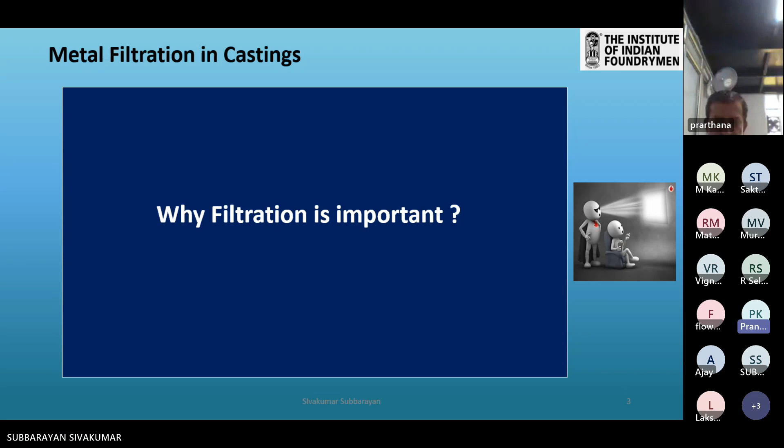Before we go into the actual foundry filters, let us go through some basics. What is filtration? Filtration is a process of inline metal treatment, a kind of metal treatment that takes place before the liquid metal is cast, meaning before the liquid metal enters into the casting cavity.

It prevents inclusions such as slag, dross, sand particles, etc. from entering the casting cavity. Whatever type of filter you use, it broadly filters the slag, dross and everything, but the liquid slag which comes from the metal or the ladle tries to enter, and the filtration effectiveness for liquid slag is not as effective compared to filtering other inclusions.

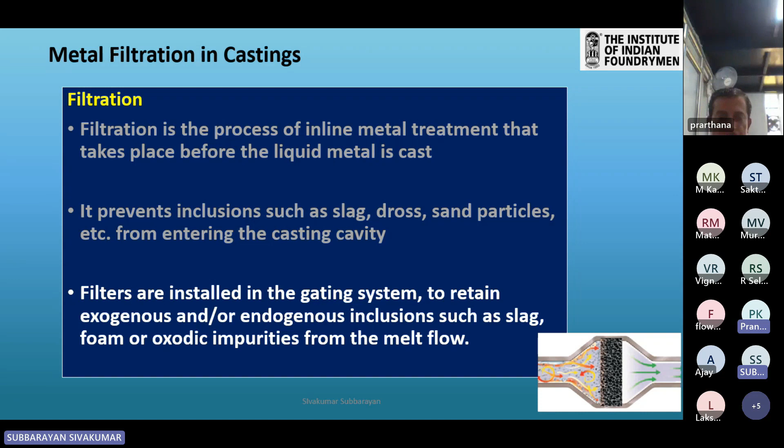So meaning, as clean as the metal, the filter is more effective. It is known that filters are installed in the gating system to retain exogenous, endogenous inclusions such as slag, foam, and other volatile materials which come from the melt flow. Depending on the purpose, filter materials used are like zirconium silicate, zirconium oxide, silicon carbide, and mullite, etc.

Filters were originally introduced to prevent non-metallic inclusions in the liquid metal. When the concept of filtration evolved in the foundry industry, maybe 10 or 20 years back, the original intention was to filter out non-metallic inclusions. Later on, a lot of research evolved in the filter manufacturing industry, and while this is still their main function, they are also used to control the velocity of the molten metal.

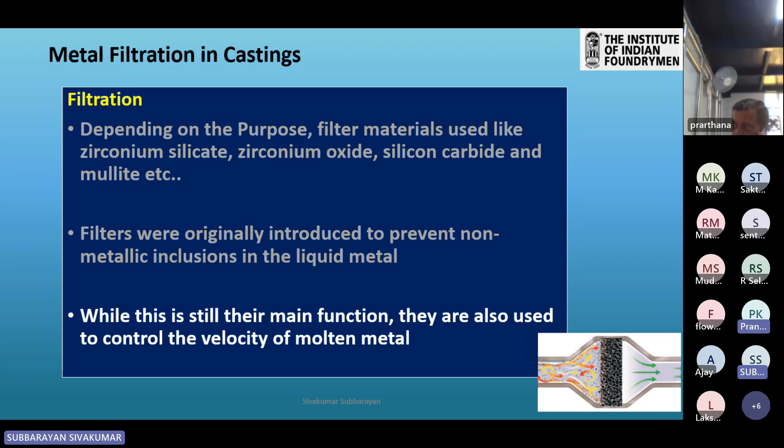When the metal enters the running system, up to the point of the filter, it can be a turbulent flow, but once it crosses the filter...

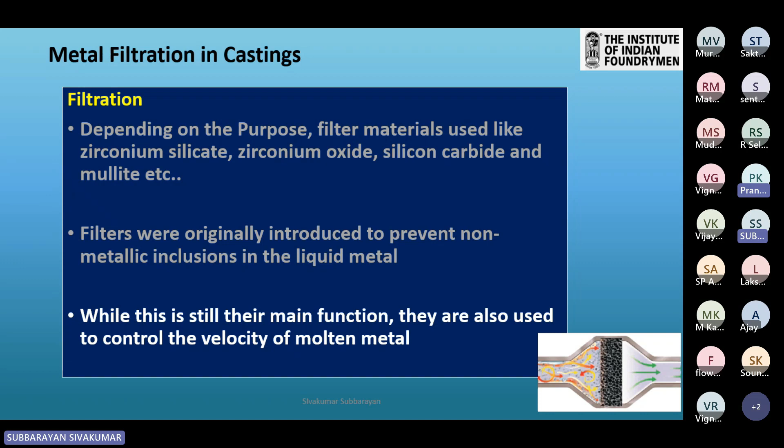So when the metal crosses through the filters, what turbulence does it create in the running system? Once it crosses, it becomes a laminar flow. So it is really helpful to maintain or sustain the velocity of the molten metal.

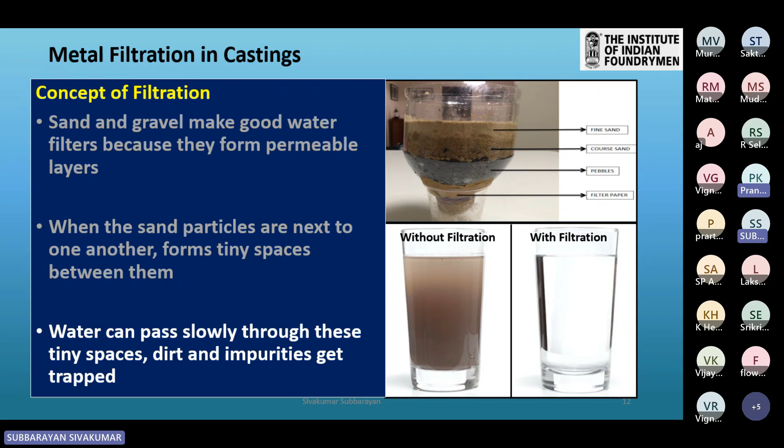So when it comes to metal filtration, it separates solid particles and impurities from any fluid with the help of a filter medium. Here is our filter - this is what I was talking about.

When the metal enters the running system just before the filter, it was turbulent. Once it has processed through the filter, it becomes laminar flow. It won't affect the metal and it won't erode any sand or coating from the running system. This is one of the additional biggest advantages of introducing filters in the running system. Yes, we know it is a cost burden to foundries, but if you see the overall effectiveness, we have to use it.

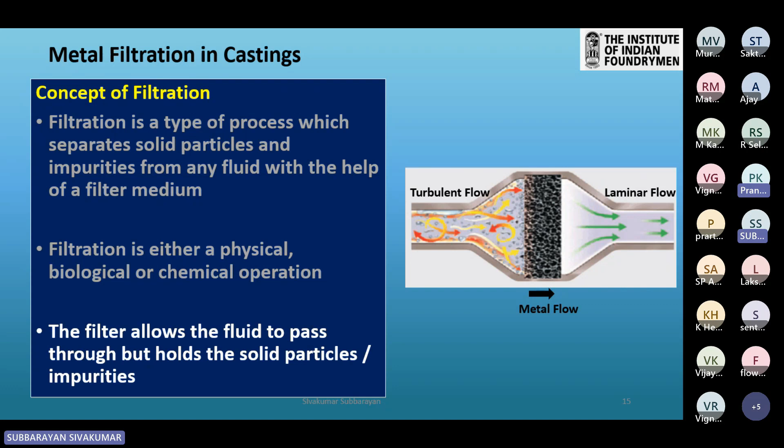So filtration is a process, either a physical, biological, or chemical operation. The filter allows the fluid to pass through but holds the solid particles and impurities.

So let us move on to the types of filters which are available in the industry and which are being used in many foundries, whether it is a small casting manufacturer, a medium casting manufacturer, or a bigger casting manufacturer - for iron, steel, or non-ferrous metals like aluminum.

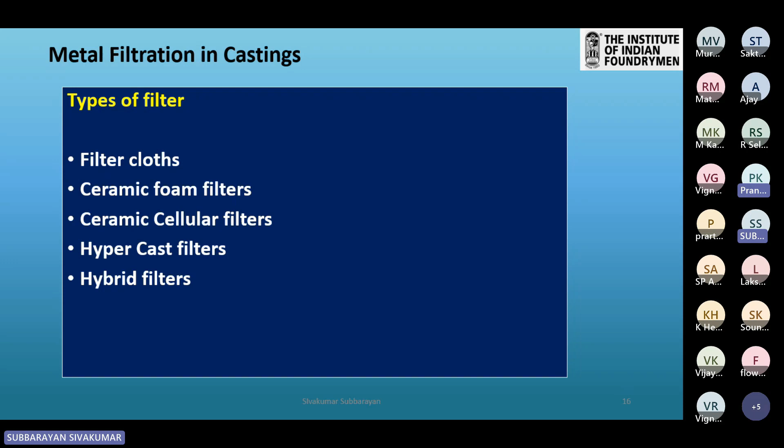So there are cloth filters, ceramic foam filters, which are predominantly used in many foundries. Ceramic cellular filter or extrusion filter, or you call it as straight hole filters. Hypercast filters is nothing but the same straight hole filter with a high density material packed in that. And the last one is hybrid filters. Let us go one by one and see what are all the salient features. Let us deliberate.

Cloth filters. So these are all made of woven refractory glass. It is very thin in layer. Although they reduce turbulence, yes, obviously it will reduce the turbulence.

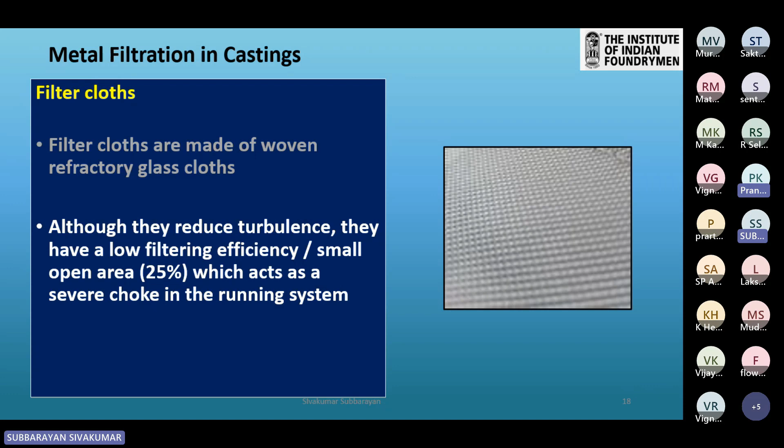They have very low filtering efficiency because of the small open area, which acts as a severe choke in the running system. The thickness of the filter is very low, and the metal bearing area is very less, and hence the effectiveness of this filter is very limited compared to other filters. It doesn't mean that it is not usable. Compared to other filters it is less, and based on the space and other practical constraints in the mold or pattern, we can decide on this.

Collection of hygroscopic materials or condensation can lead to fabric plugging, loss of efficiency, and pressure losses. These are all the difficulties or limitations of this type of filter.

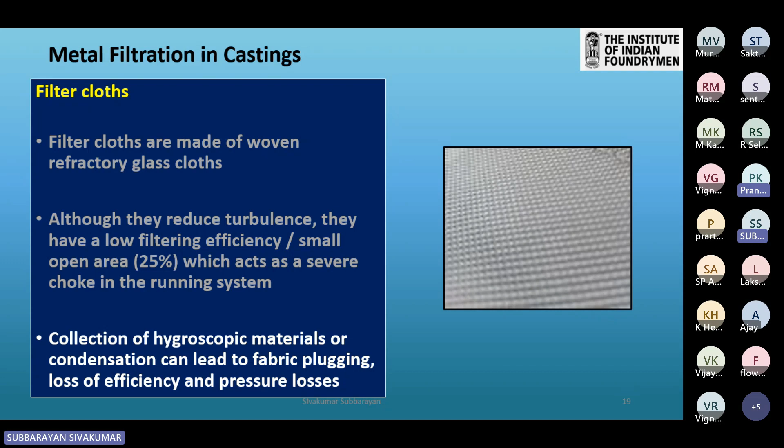Let us move on to the ceramic foam filter, we call it as CFF. This is the filter predominantly used in many foundries with various sizes and shapes. They are the most effective and efficient metal filters. They have an open pore reticulated structure with a very high volume of porosity, over 90%.

It has very high surface area to trap the inclusions, and the biggest advantage is that honeycomb structure which is created in the foam filter. It doesn't allow any impurities to pass, but in this also any liquid slag is bound to cross. The metal takes a tortuous path through the filter, affecting the removal of very small inclusions. Being a honeycomb structure, once the metal enters one side of the filter, by the time it comes out, it has to travel through a very difficult path. So in that, all the impurities are being filtered.

That is one of the main reasons for the success of these ceramic foam filters. By attraction and absorption to the internal ceramic pore surfaces, the filtration happens. Passing liquid metal through the ceramic foam filter reduces impurities, including non-metallic inclusions.

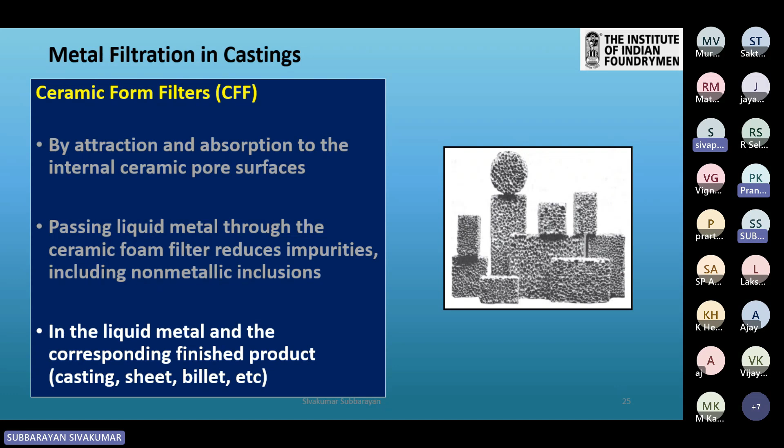So in the foam filter itself, we have three varieties, depending on the application and the material which we are going to use. These varieties are being used in foundries: alumina ceramic foam filters, silicon carbide foam filter, which is predominantly used in many foundries, and zirconia foam filter.

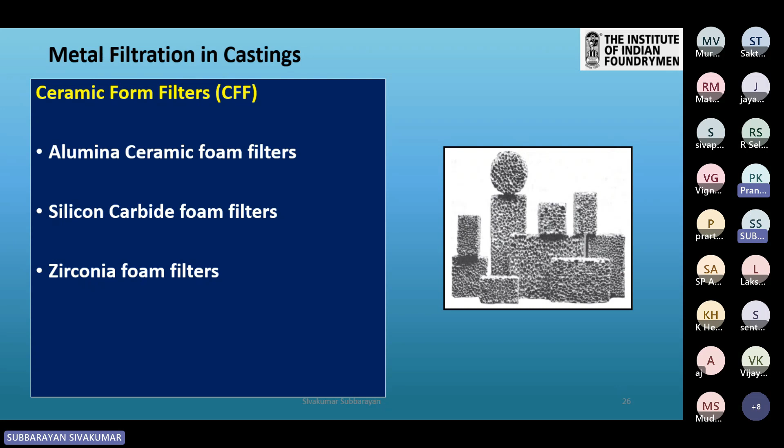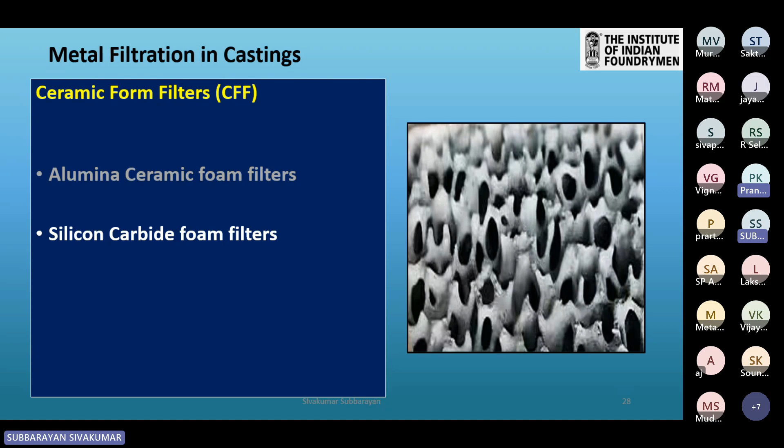Alumina foam filter is almost white in color. Silicon carbide filter is light gray to dark gray in color. Zirconia foam filter is pale yellow. Out of these three, silicon carbide is predominantly used because of its versatile advantages like effectiveness of filtration, ease of use, and cost effectiveness compared to the other two.

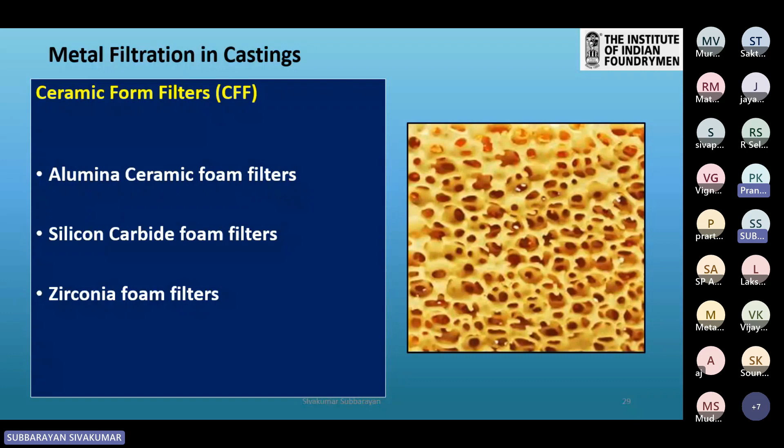The next one, we move on to ceramic cellular filters. It is again an extrusion filter, or straight hole filter as we call it. It has a square section as well as a circular section. Nowadays, any section you want can be manufactured, depending on the area available in the running system. Since the ceramic walls are thin, it can have only up to 75% open area to filter, whereas our foam filter has more than 90% of the area.

It's commonly used in aluminum castings, where small castings are being manufactured, and in high pressure molding lines.

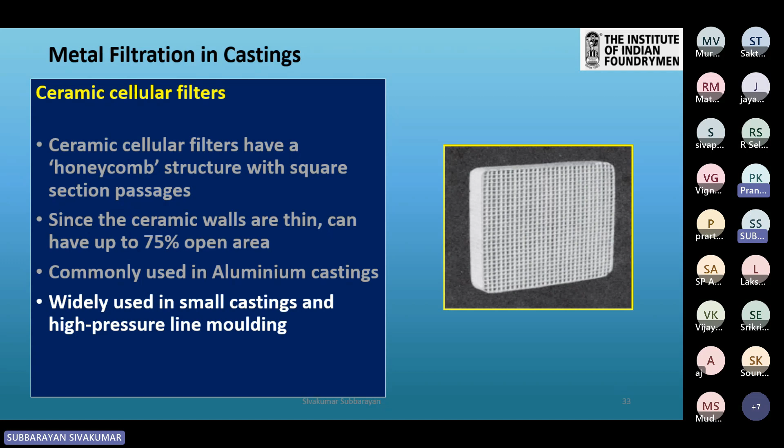The next category is the hypercast filters. Among all the filters, hypercast filters have a very high capacity space, so it will be helpful to accommodate other filters. Because of this higher capacity and fewer filters needed, the cost of filtration is comparatively less compared to other filters.

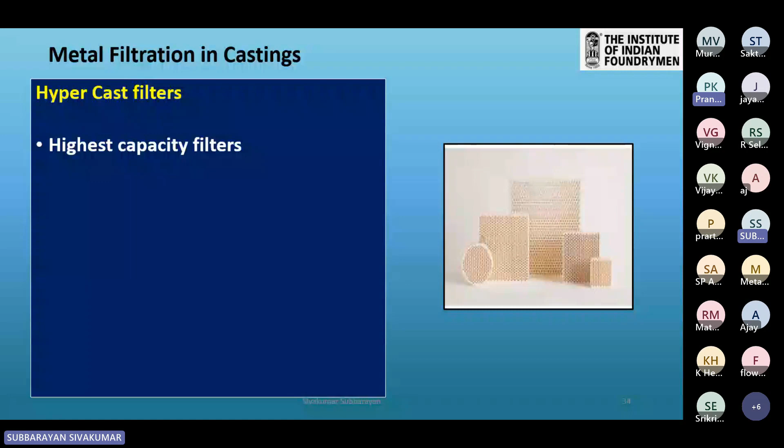The critical castings in many foundries need a hybrid solution for filtration, especially bigger castings. It can be used for all types of bigger castings, irrespective of the grades, whether it is steel, ductile, or grey iron. If it is a complex casting, yes, the best solution is a hybrid or dual layer filter.

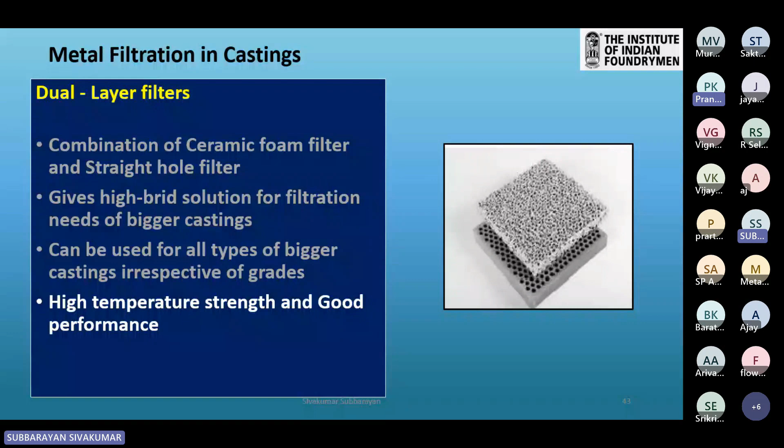It has a high temperature withstanding strength and good performance. So far we have covered the types of filters commonly used with respect to small, medium, or bigger size castings.

Let us move on to application methods of filters. Each foundry has its own style of running system. It differs from foundry to foundry, and we can say it is a secret of that foundry, depending on the space availability and comfort of the operating team. These are all the methods used to accommodate the filter in the running system: horizontal, vertical, single filter, and multiple filter, with different sizes also being used, depending on the space and filtration capacity. There's also a round filter method, and other customized design methods.

I have a few pictures so the team will have an idea how this is implemented in other foundries, and it may be useful to adopt in your foundry as well. These are all the application methods. I have some pictorial views so everybody can understand the concept and it may be useful to adopt or use in your respective foundries.

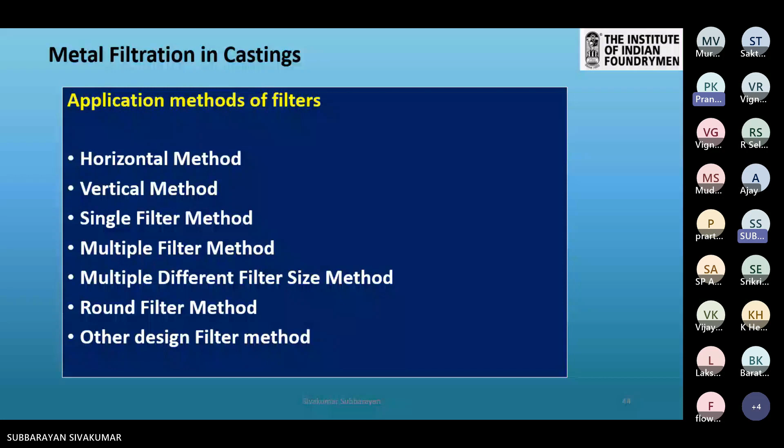It's a simple horizontal type of filter. We can use a single or a double filter, depending on the filtration capacity and liquid metal requirement. The metal entry is given from the top of the filter, the metal is filtered, and it goes to the bottom. From there we take a runner bar and it's sent or connected to the casting through an ingate, either a ceramic ingate or a normal sand ingate. This is one of the typical methods used in many foundries, I hope.

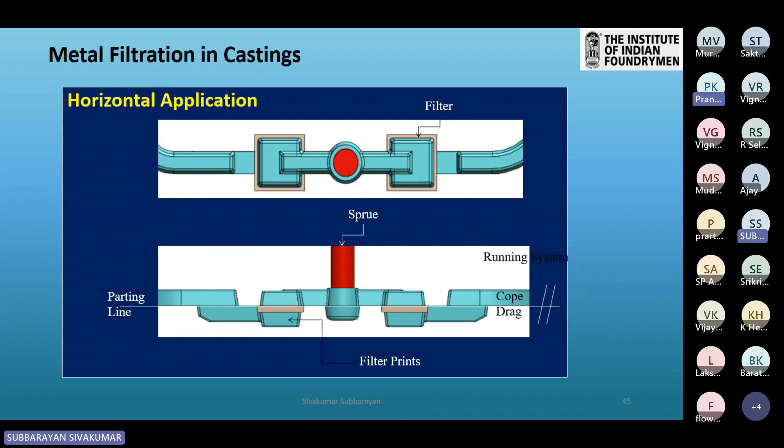When it comes to the vertical method, the design of the filtration mechanism is very crucial because it should have a proper bearing, with filter bearing locations on all 3 or 4 sides. The biggest advantage is that it allows maximum space to filter. One disadvantage compared to the horizontal method is that only 3 sides allow the filter bearing area, because in the cope we need to have a print, and when we close it, there's bound to be minor crashes. Hence normally we don't give any print over the top mold or cope mold.

Nevertheless, it's used effectively in many medium sized foundries because it gives effective filtration, and the inlet and outlet are designed in such a way that it accommodates perfect metal flow. When it goes out of the filters on 2, 3, or 4 sides, it depends on the casting design and running system design based on liquid metal capacity. When it goes out from the filter, the entire metal flow is made smooth, with only laminar flow.

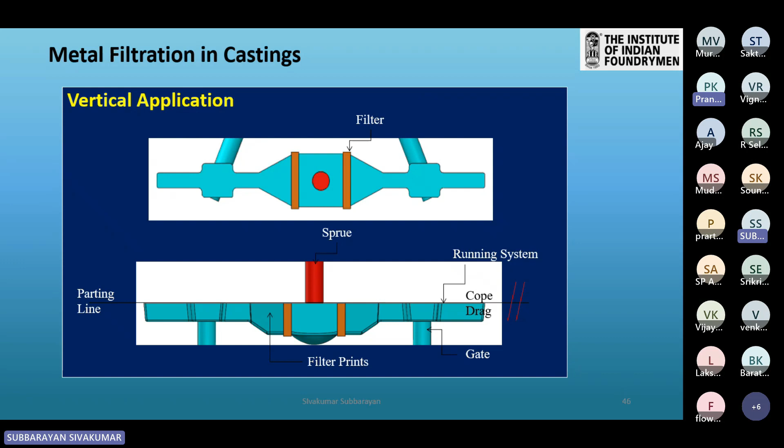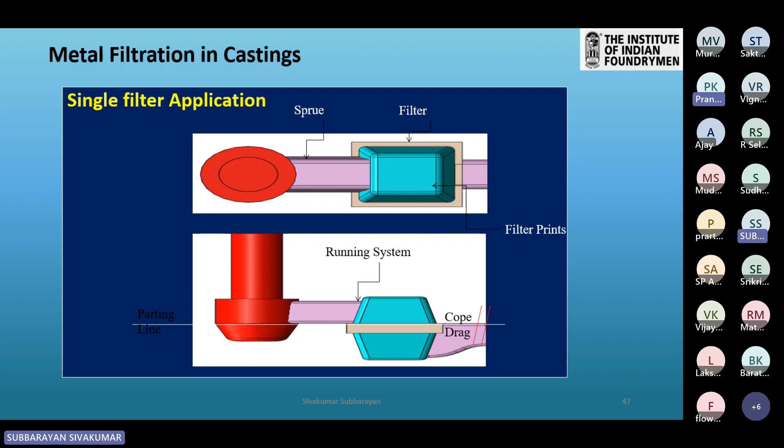This is again a single filter application, and again it absolutely depends on the liquid metal capacity or casting weight with which the running system is decided. The metal enters at the top, filters through the filter by gravity, goes to the bottom, and from there it is taken out and connected to the casting, sent to the casting cavity.

The next interesting method is the multi-filter application. We make a cassette type arrangement using 2 or 3 filters. I have good experience with these. On one component we used 3 filters in a row, then 4 filters in a row, but after machining we found filter broken particles in the casting. When we discussed with a filter expert, he said it is not advisable to have 4 filters. Then we converted to 3 filters in the cassette, and after modification we didn't have that problem at all.

So when we go for a multi-filter concept, it is advisable to go with a maximum of 2 filters in a row normally. If it calls for additional capacity, go with 2 cassettes like that. We have some pictures to demonstrate this additional multi-cassette arrangement. So it is better to have a series of filters in a row, but restrict the number of filters to between 2 and 3 maximum.

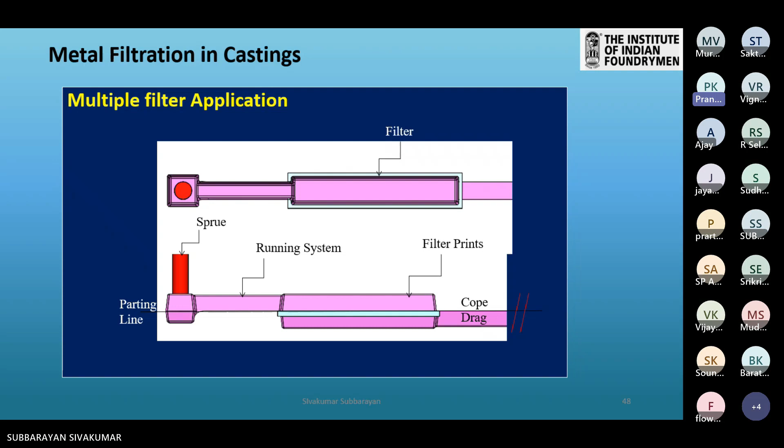Yes, this is the one which I talked about. If the number of filters required is more than 2, 3, or 4, it is better to have 2 cassettes like this.

One interesting thing is we have bigger size filters, 2 filters, and smaller size filters on both ends, depending on the space on the print or the match plate. We can design like this also.

We have successfully implemented this design with various sizes, multiple filters in a row. I can say it is a hybrid solution for bigger castings, and we came out of the issue of filter breakage in a big way. After implementing this, the filter breakage issue is totally eliminated.

Once the filter breaks, the casting is gone. We are already spending 1 to 1.5 rupees per kg of casting for introduction of filters. Spending more and still losing casting is purely a lack of proper engineering knowledge. Once we think with multiple options like this, we can find a solution to avoid any filter breakage.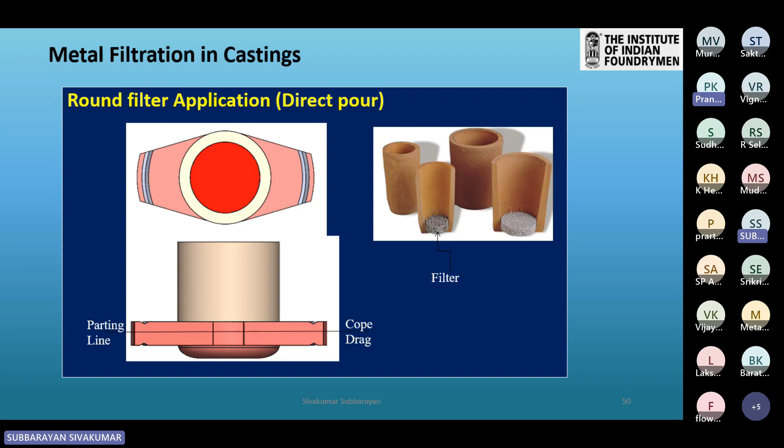That is very essential to avoid any neck choke. Some other customized designs we adopt: bigger filters and smaller filters in a row to accommodate the required number of filters as well as the required number of in-gates, depending on the casting, match plate space, or print space.

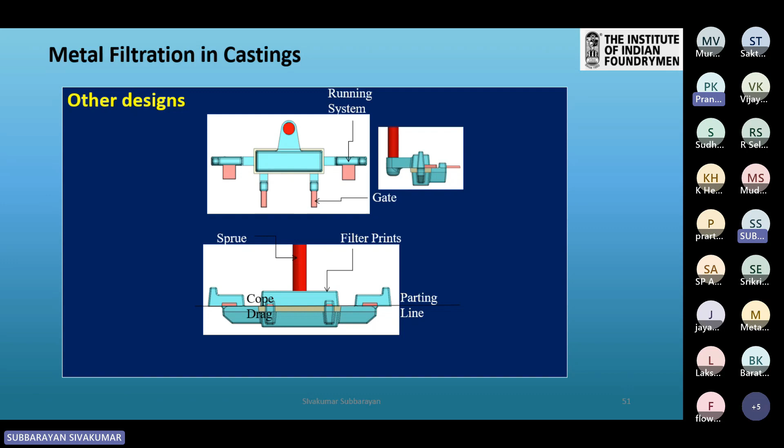It's yet another customized design. Both ends have a metal inlet with horizontal deployment of filter. Additional in-gates have been taken out and connected to one of the housings we produce successfully.

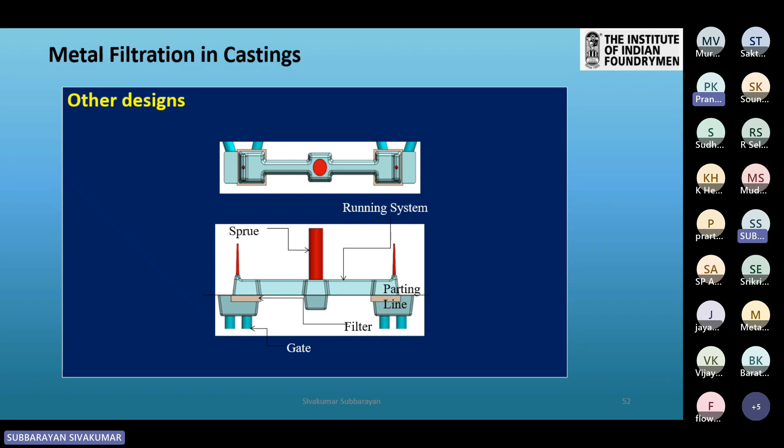I have some case studies from my experience on how the filter helps to filter out inclusions, to what extent. If it is not designed properly or not deployed properly, it creates a problem also.

The fix for this was modification of the filter design. The major reason was we kept 4 filters in a row, which created the problem. Now we have altered this and come out of that particular issue.

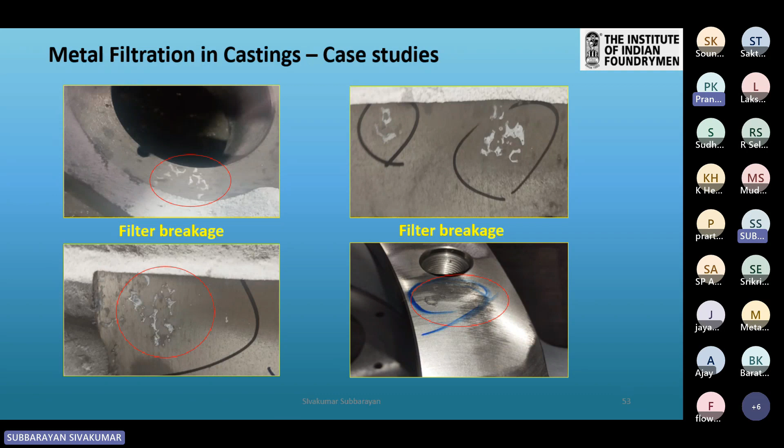The purpose of placing the filter is to filter out unwanted things. When we create such gaps, unwanted non-metallic inclusions float through these and enter the casting. Of course 80-90% will be filtered out, but we do not know where that non-metallic inclusion will sit in the casting. If it comes in the machining area, the entire effort is gone.

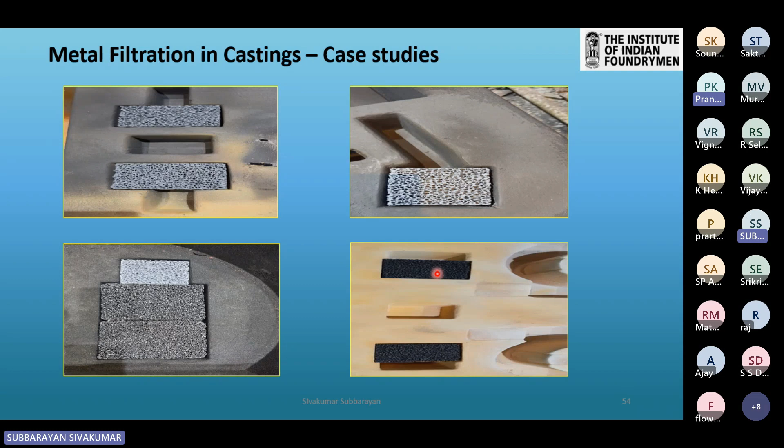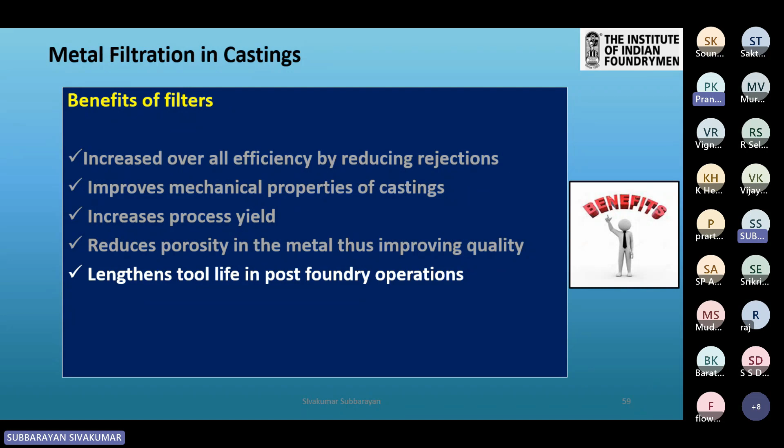It extends the tool life in post foundry operations, particularly machining. If sand comes to the machining surface, it inserts within a single cut and reduces insert life. So it certainly improves the tool life in the machining operation.

It gives increased productivity. For example, in ductile iron, when I introduce the filter, it drastically filters out the dross, which is a killer in post fettling operation. Till the dross is fully removed, our NDT team will not clear the casting. Normal fettling takes 8 hours, and dross cleaning or grinding takes another 8 hours. So when we introduce the proper type or right category of filter, it filters out the dross and directly improves productivity.

As I explained during the earlier slides, it enables laminar flow and hence no erosion of sand in the running system.

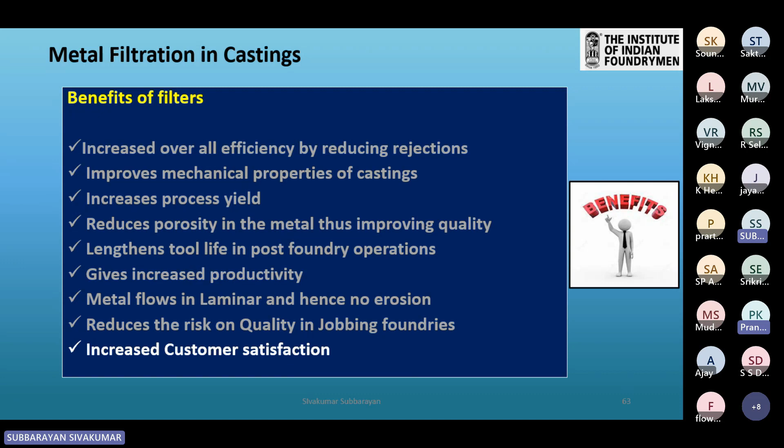It reduces the risk on quality in any jobbing foundries. In jobbing foundry, the volume is limited, as you know. Even with that limited quantity, if you lose some castings because of impurities or inclusions, it is a big burden on foundries. It reduces the risk of quality and increases customer satisfaction, which is the final motto.

Though filters are recommended, they have some limitations when used in the foundry. To my knowledge, proper testing or checking facilities are very limited, or only the manufacturer will have them. As an end user, we do not know how to test, or we don't have the facility to test. We just follow, receive the filters and use them. Only a visual check is done, to see if any crack is there, so it depends on person to person. If a cracked filter is placed in the running system, it hurts the casting.

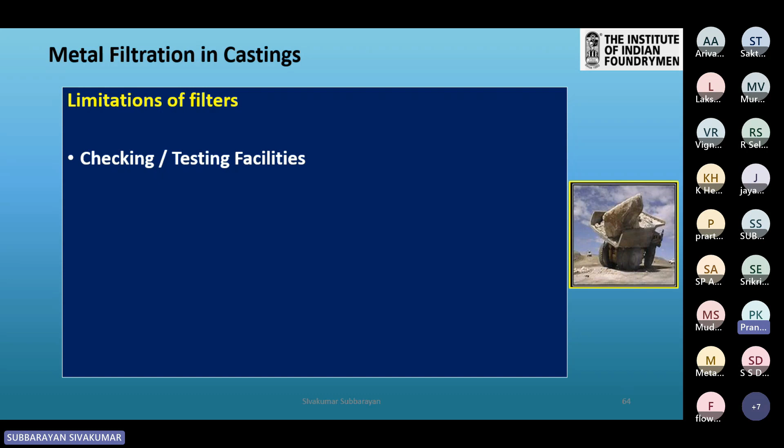Cost of filtration is a burden on product cost and impacts competitiveness. When it goes to bigger castings, as I told you, it is 1 rupee or 1.5 rupee per kg of casting, but when you see the overall advantage, it is nullified.

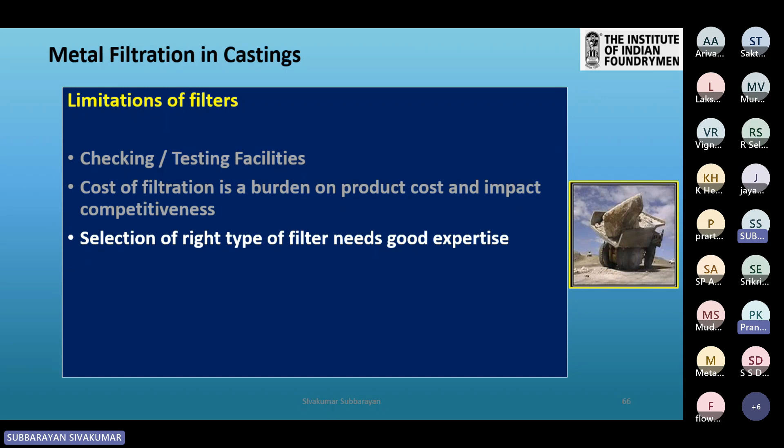Selection of the right type of filter needs good expertise. So many foundries depend on the filter manufacturers, and it has its own pluses and minuses. It is known to everybody.

Any type of filter has limitations in filtering out the liquid slag. I have used straight hole filter, hypercast filter, and honeycomb filter, that is the foam filter. Liquid slag is not being filtered out.

There is a marginal decrease in direct yield, that is pouring yield, because of addition of the filter in the running system. But if you calculate the overall yield, there is a drastic increase, along with the number of castings poured, number of metric tons poured, and number of metric tons sold out. We have a major advantage on that.

Filter print design is highly customized, and it needs expertise over a period to avoid difficulties due to this filter design of the filter print, and to accommodate effective filters in the running system.

Filters are to be fixed as close to the castings as possible for best results. This point is very vital. This is a recommendation by many filter manufacturers. But when we practically design our running system, it may be difficult to adopt this particular technical point due to various practical difficulties, like a dowel pin or core print, or the space in the match plates. So again, it is subjective, and it varies case to case, and we should adopt the best solution for getting the effective filtration method.

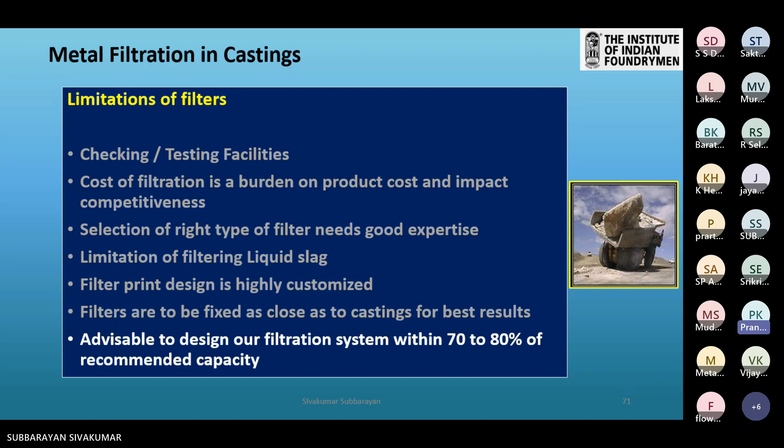It is always advisable, from my own experience, to design our filtration system within 70 to 80% of the recommended capacity by the supplier, because suppliers or manufacturers will always give a range, like 100 kilos to 130 kilos. If you design the system for 130 kilos, it depends on how clean your metal is, how clean your running system is, how clean your mold is, all those factors. So even if you lose just one casting because of filter breakage, you have to compensate with 50 castings. So it is always advisable, and we started practicing designing the system with a maximum of 80% of the recommended capacity.

One interesting input I got from a senior foundryman from Bangalore: in one of his assignments, they were continuously getting non-metallic inclusions in the casting even after using filters. So they listed out the probable causes and eliminated them one by one. Finally, they came to understand it was the foam filter. There is a coating used in the foam filter, and the improper quality of that coating was the root cause. It was dissolving when the hot metal went in, and settling on the casting surface, then opening out after machining, and they lost a huge lot.

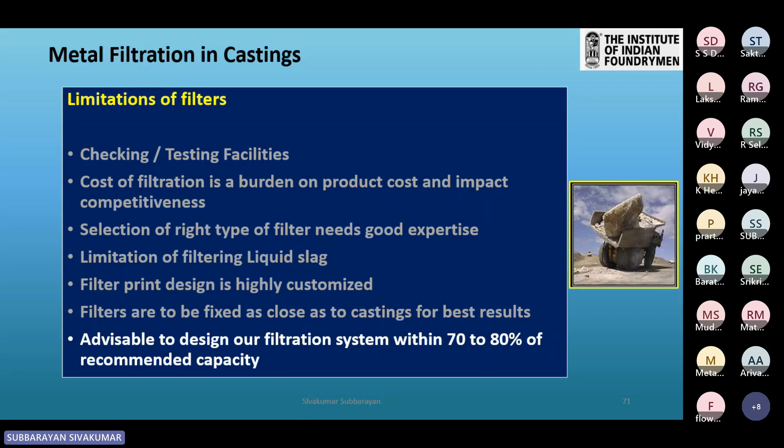Obviously, the material of the casting to be poured and the quality requirement of the casting matter. If the casting calls for level 1 or NSD, some castings even require 100% NSD, non-significant defect. So we have to design our system with high quality filters, high level of filtration capacity, to avoid any impurities in the casting.

Flow rate and anticipated volume of the liquid metal to be poured in the casting is another factor. Based on the volume, we decide the number of filters and how they are to be oriented, whether vertical, horizontal, multi-filter, or multi-size filter arrangement. It depends on the volume of metal to be poured, and it has to be designed in a suitable way. Again, it varies from foundry to foundry.

It's also the alloy used in the metal that decides the PPI requirement, that is, whether 10 PPI with coarser filtration is okay, or a much finer filter is required. Again, casting volume plays a role.

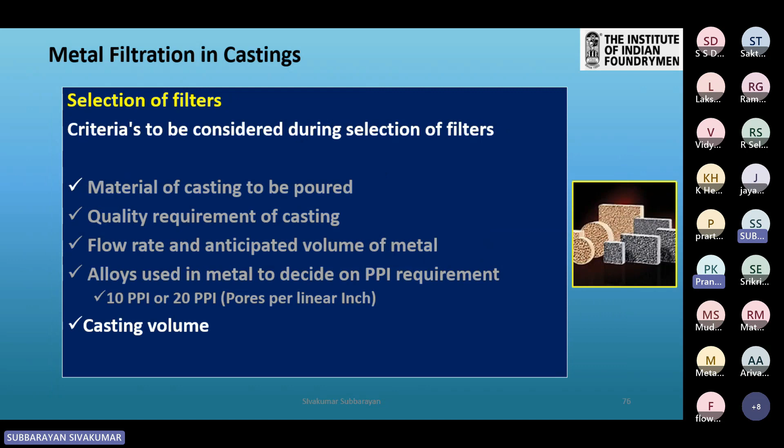So I've listed down some of the recent trends in the filtration industry. To cater to the extensive and increasing demands of foundries, good research has been done by filter manufacturers. These inputs are taken from one of the leading filter manufacturer websites. An optimized filter housing design gives 3 times the filtration area using tubular or cylindrical filters. It is a zirconium filter, and it looks very impressive, the research that has gone into it, and it's really helpful for the foundry industry.

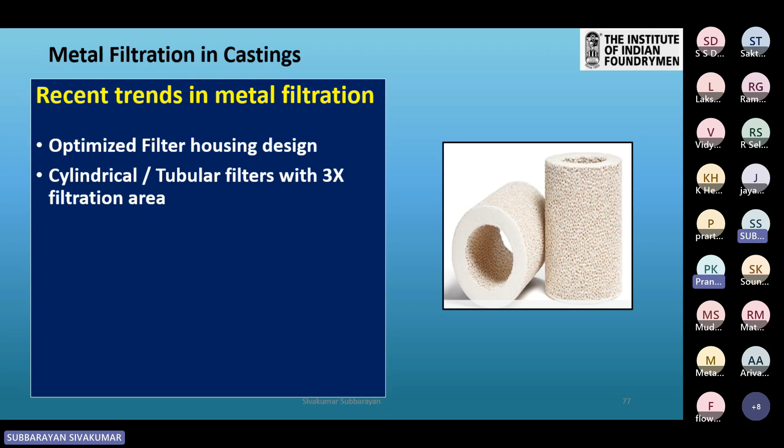Ceramic pots are another trend. Instead of keeping the filter in our sand running system, there are ceramic pots available with male-female arrangements, so the entire metal goes through the ceramic system and there won't be any metal-sand erosion. It's a high degree of filtration and perfectly useful for the super quality castings we are producing.

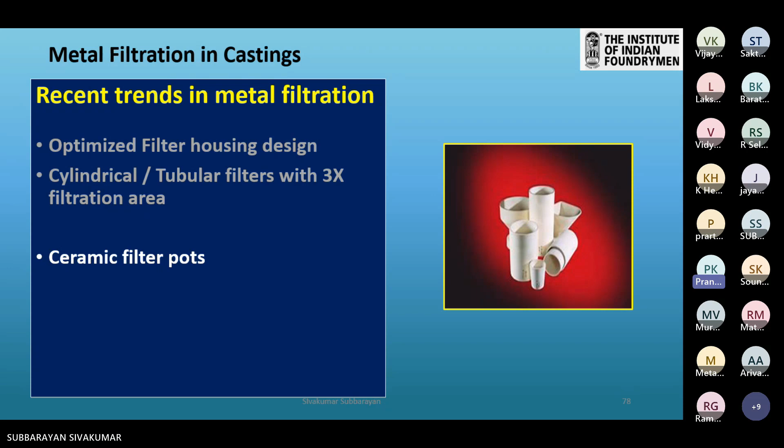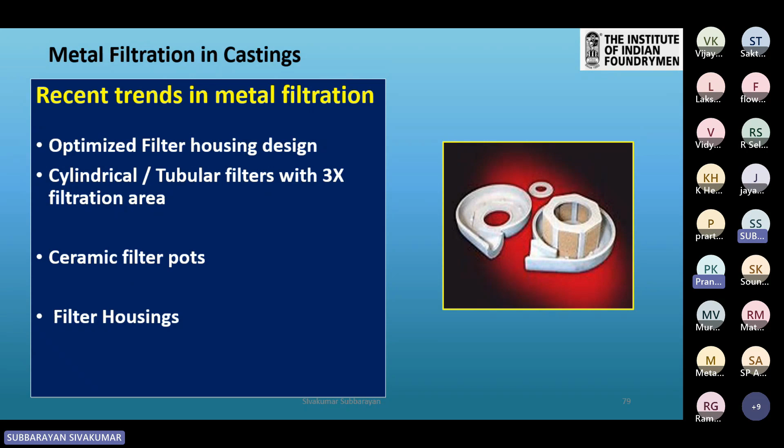There are also filter housings with 6 or 8 filters used in the same housing, again thanks to the filter manufacturer's website. It's a housing type arrangement where metal is given in the center, filters out entirely, and comes out from outside, from where it is taken to the casting. The biggest advantage of such designs is that even for bigger size castings, irrespective of the space available, it can be implemented successfully, and the quality of the casting can be enhanced in a much bigger way.

Finally, I have a small video clipping of a casting, a wind turbine casting, 2 megawatt wind turbine casting, with a weight of I think 12 or 13 tons, I forgot. So the filter helps to reduce the velocity. I would like to demonstrate here. It's a practical example I have gone through, and I have poured this casting in my experience.

Up to the filter entry, the velocity is somewhere around 1.6, even 2.5 meters per second. Once the metal enters and crosses the filter, the color becomes blue, that is, within 0.4 or 0.5 meters per second. This is a practical case.

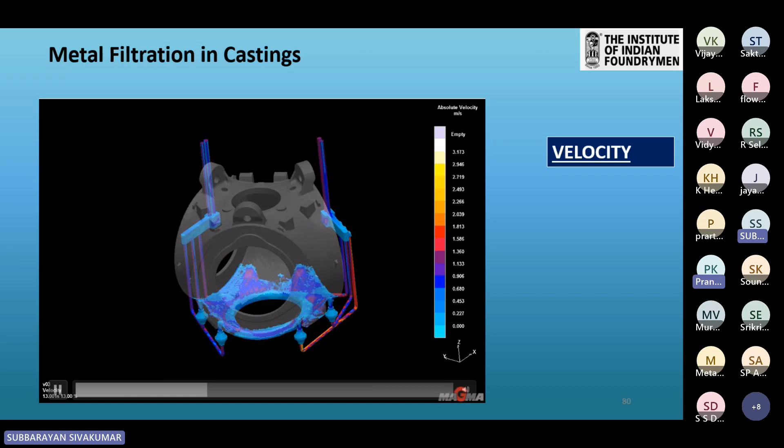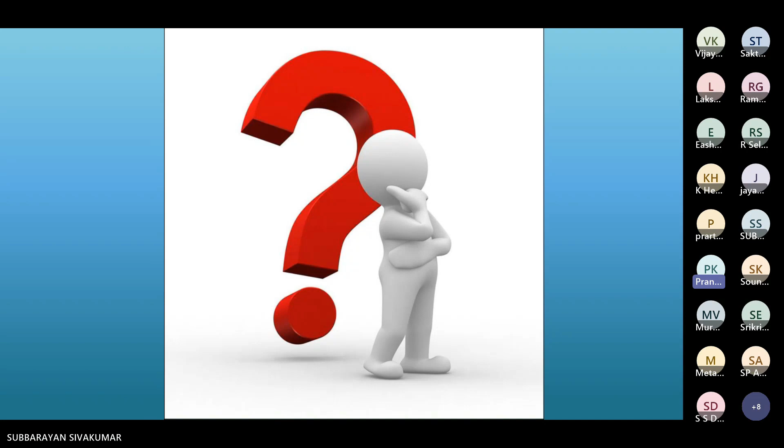It's the best example of how filters help to reduce and smoothen out the metal entering the casting, to avoid any turbulence or erosion during the metal flow to the casting. That's all from my side. If there are any questions, I'm ready to answer, or we can debate over that.

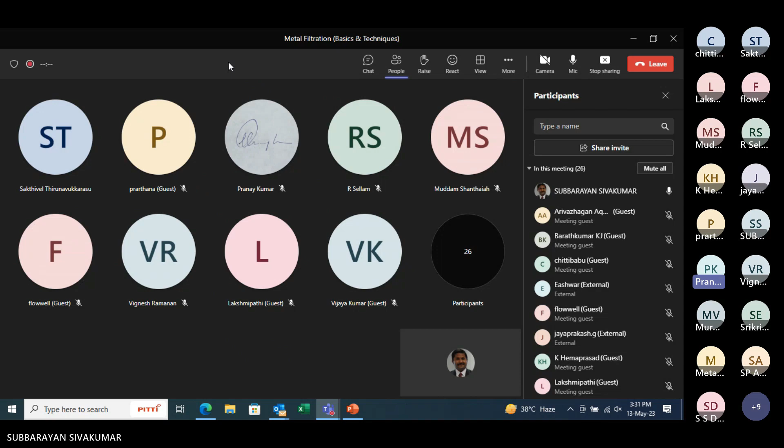Sakthivel? Yes sir. The floor is open, so anybody have any questions, please? I presume there are no questions being raised.